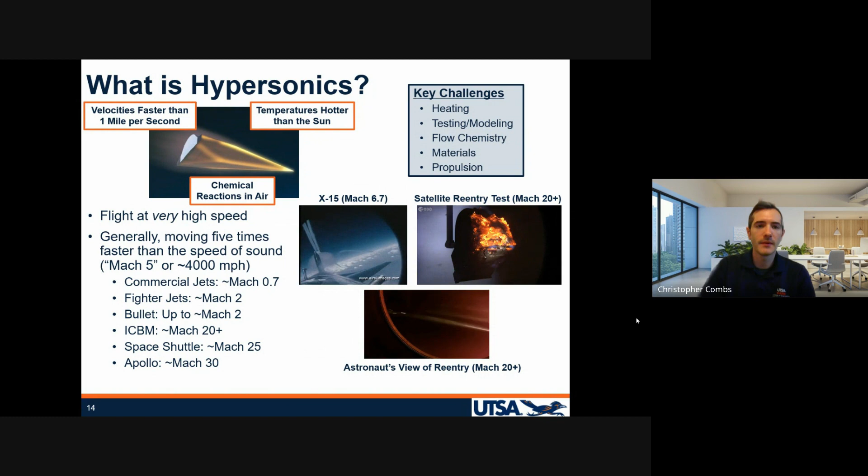And if you're coming back from the moon, Apollo, Orion, it's Mach 30 plus. All right. So we're talking about things that are moving very, very fast. Now, there's a lot of motivation to be able to ground test these things, because it's a real challenge to create this environment. And like I said, if you do a proper flight test, it gets expensive fast. A single flight test would build you a really nice wind tunnel facility, okay? Because $10 million is a cheap flight test of a vehicle, and that's kind of sounding rocket type scale test.

And on the computational side, I mean, it's 2024. We have a lot of computing power that we didn't used to have, but even still, these problems aren't particularly tractable. They're multi-physics. When you've got some of the heating issues happening, and some of the chemistry going on, it's a coupled multi-physics thing that's really challenging to get right from a simulation perspective. And we don't have the experimental data even to anchor those models. So we are still heavily reliant on ground test measurements. But even those are imperfect.

There are high enthalpy ground test facilities or hot facilities, because like I said, in this true flight environment, hypersonic regime, you have an incredible amount of heating, which becomes one of the defining factors of a hypersonic system. So one way that we can do that is with an arc heated or plasma jet facility, and there are very few of these in the world. Really, only a handful in the United States. You really just have this large arc in the plasma facilities. It can be inductively coupled plasma, which works in a similar way, but you're creating a lot of heat flux that can actually be representative of reentry conditions. These are pretty much the only way that we can reliably test space reentry materials or these high temperature ceramics and ablators.

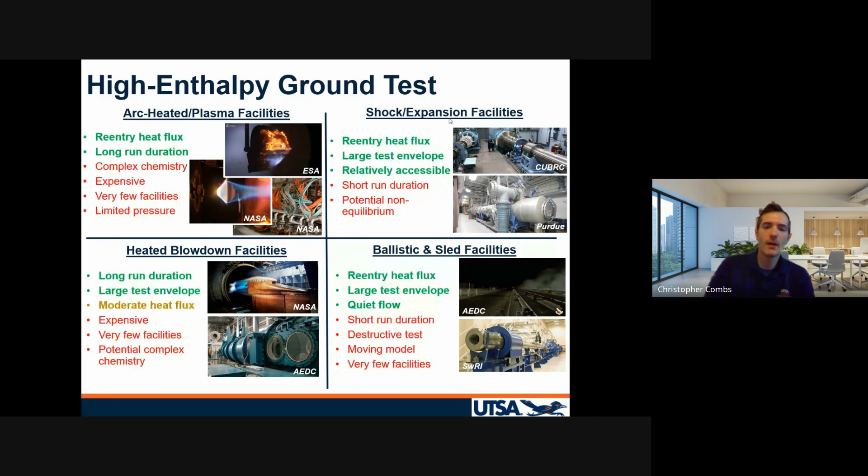So what we did at UTSA: all of these facilities are very complex. They all come with their challenges and still don't quite hit the mark. So to have something that students could actually run on campus, we actually went low enthalpy. We said, let's not worry about the heating side of it, and let's focus on the aerodynamics. So we can do high Reynolds number and high Mach number up to Mach 7.2. Actually, we can hit Mach 11 if we switch the test gas to helium.

We built this tunnel on campus, like I said, mostly built by students. It's what's called a Ludwieg tube facility. It makes it a lot more accessible. And compared to facilities where you're looking at costs of maybe $1 million a week, we have very, very low overhead here. A single test in terms of raw materials costs as little as $10 or $15. It's an 8-inch by 8-inch square test section.

That's right here. The way that this works, you have high pressure on this side on this long piece of pipe, low pressure here in the vacuum section, and the nozzle. You've basically got a diaphragm here, and you pressurize this air up until that metal diaphragm pops and bursts open. That allows the high pressure air to rush through the nozzle into the vacuum. And then we test here; this nozzle, shaped just like a rocket nozzle, expands that air out to high speed, and we get Mach 7 conditions here.

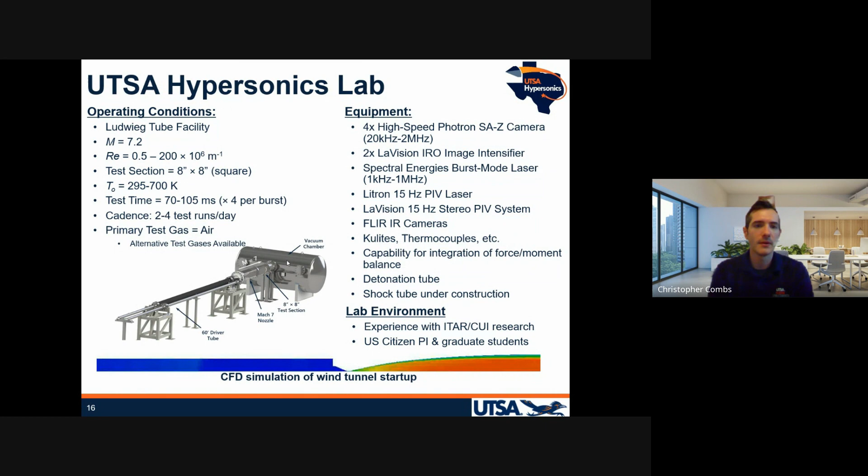And when we image everything with high-speed cameras that can frame up to 2 megahertz, it's actually a really long time. When you play things back at 30 frames per second, like you're used to watching movies, we get 10 or 20-minute videos of what's happening during steady conditions in our flow. So we get lots and lots of data. We can turn the facility over very quickly, really in about 20 minutes. So we can, this says 2 to 4 times a day.

It's probably more than that now. I think our record is 7 or so. Most of our time usually is not limited by the facility. It's limited more in changing out our experimental setup, messing with optics and cameras and stuff, because we do a lot of advanced diagnostic work.

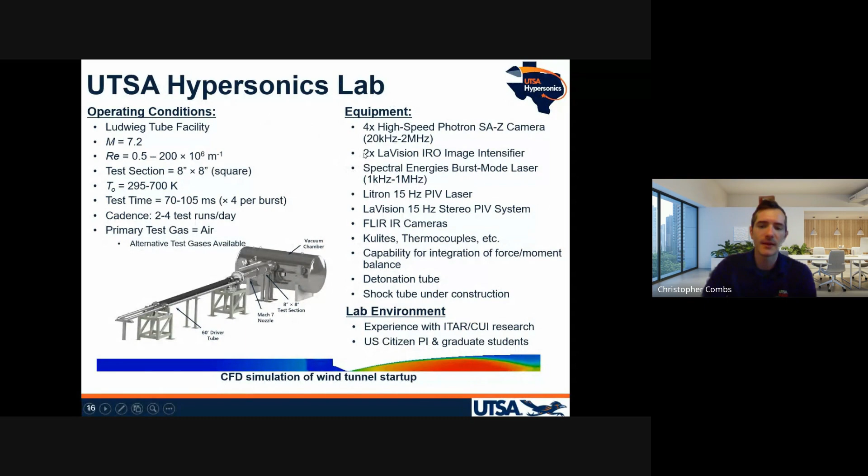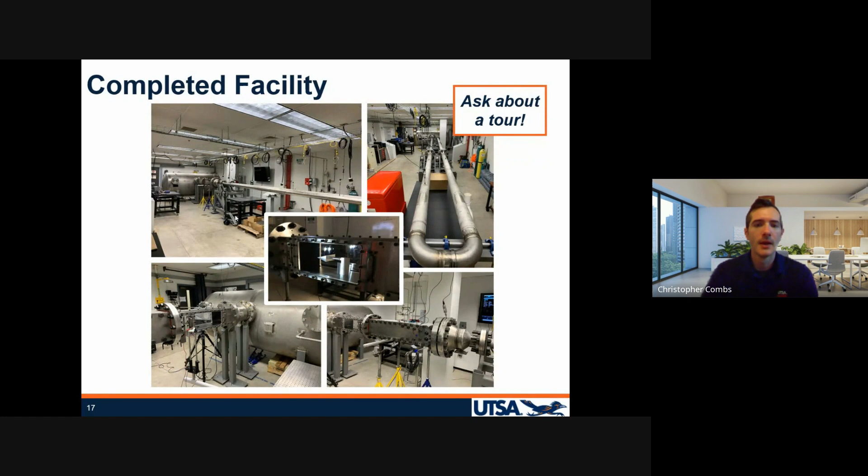And I kind of like to point out, all right, this is real. We built it. I see a lot of stuff like this where, you know, they're kind of PowerPoint facilities. It's something that's aspirational, but whether or not it ever actually happens, who knows? We've been running this for a while. We've had over 600 tests since we built this thing 3 years ago. So it came on really well and has been a real workhorse for us.

And like I said, the students are the ones that have ownership of this facility in my eyes. They built it, they operate it. That was kind of part of the design, and that was part of the motivator for why we went low enthalpy. It was going to make it easier for the students to work with and train on, but it's given us a capability where we can do some very relevant aerodynamic measurements, as I'm going to show you, without worrying about some of the more complicated physics that you deal with that are not always tractable.

Also, I'd like to give some context here for the sort of gap that exists in hypersonic tests. Now, few of us there are. It's a small community. So in the U.S., there's about 20 places that are doing active hypersonic ground tests. And this includes our national labs, universities, NASA centers, et cetera.

Now, if you limit this to universities, there's about 13 doing hypersonic tests with tunnels at M greater than 5. And then at places with a Mach number above 7 that they're capable of testing, there's really 6. And I'm kind of being generous. A couple of these aren't particularly active. So it's a very small group.

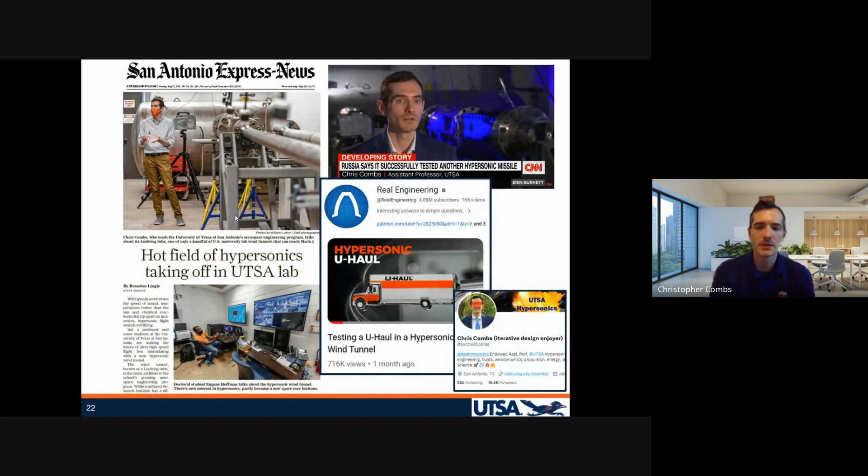And we've gotten a lot of press about this. We've been in the local news. There's a Real Engineering video. If any of your students like that channel, check it out. We've been on CNN and have a bunch of good social media outreach. So it's been fun, the positive reception that we've gotten for this tunnel.

And so what we do in this lab, it's about half our portfolio are fundamental fluids measurements related to aerodynamics, and about half are really focused on developing those measurements. So we do a lot of both. And then when we've got these high-speed measurements, a lot of laser diagnostics and imaging that happen, you're getting gigabytes of data for every shot.

That requires a bunch of statistical analysis just to pull a thread to understand what it is that you're seeing in the data set, and a lot of image processing. The students probably spend more time writing code than they do actually conducting their experiments, because once they get that pile of data that they're sitting on, they've got to make sense of it. So that ends up being a good chunk of our time too, developing those analysis tools.

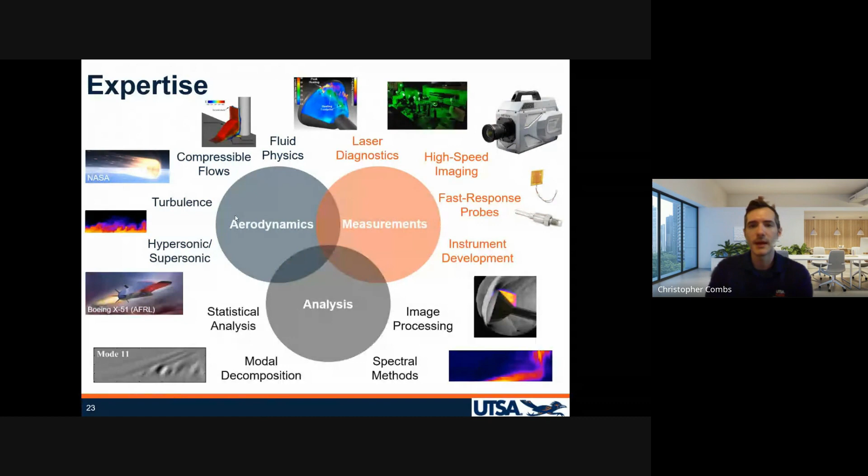And a big focus, like I said, is on developing these measurements, which is not necessarily straightforward. I tell people, anytime you can measure something at Mach 7, it's a big deal, because that's a hard thing to do. As I kind of alluded to, we've been doing hypersonics since the 1940s. So this is not a new flight regime, but a lot of these measurements are new. Because for a while, we were sort of limited to point probe-based techniques. You have a pressure sensor that you scan around or something like that.

But in these facilities, some of the ones I've talked about, and in our facility as well, whether you've got plasma and high temperatures or the run duration is short, you don't want to be restricted to scanning something. Also, if you have an intrusive probe, then you're changing what you're measuring. Some of these probes won't hold up in certain conditions. So it's appealing if you can do something non-intrusively with optics and light and cameras to measure not just a single point, but an entire field of view, or maybe even a three-dimensional field of view.

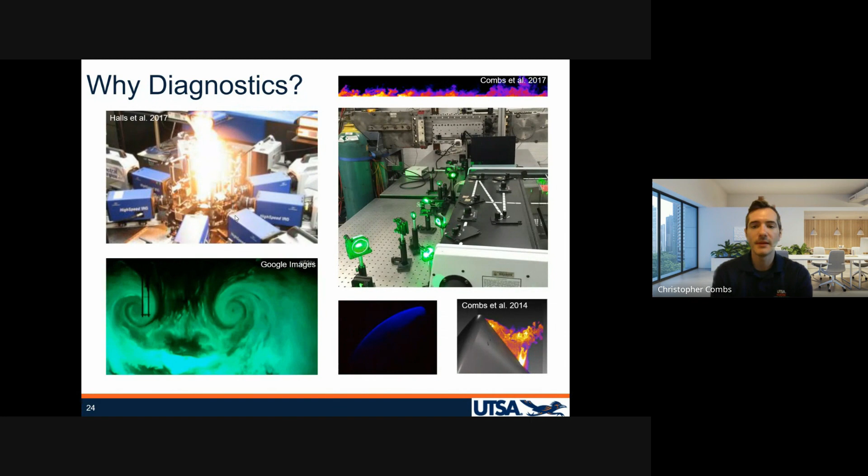That becomes very powerful. We didn't do this for a long time just because of the limited availability of the technology, but now high-speed cameras and high-speed lasers are becoming commercially available, which has made these things much more tractable. So we do use a technique called schlieren imaging. That is sort of our bread and butter first thing that we throw at something that is pretty reliable, just to do visualization of the flow.

That's what you see. This is just an air jet right here, but you're going to see some examples of this in the tunnel. We do a lot of free flight testing where we actually cut a model loose in the test section, let it fly for that 100 milliseconds. And then the nice thing about the free flight testing is you can get your forces and moments. I'll talk about that in a second.

We've got a technique called planar laser induced fluorescence, where we introduce a chemical tracer into the flow, and then we can tag it and track it with a laser and a camera. That's really great flow visualization on the surface, but you can turn that into things like pressure, temperature, mole fraction if you understand the chemical well enough. You can also track where the molecule goes in this technique called molecular tagging velocimetry that I have a slide on here in a second.

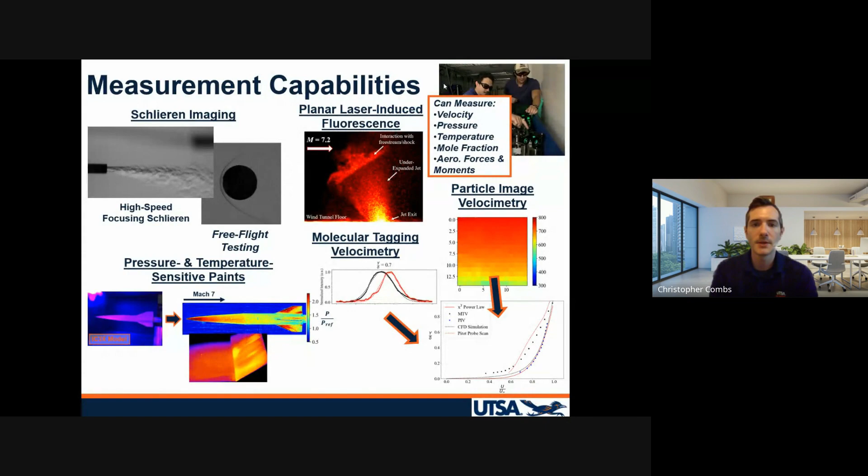We do velocimetry with our lasers using a technique called particle image velocimetry, and we even develop pressure and temperature sensitive paint in-house. And I've got some slides to talk about that briefly also. But really, overall, the big picture is with the various non-intrusive techniques that we have, sort of our mantra is if someone wants a measurement, we have a way to do it. And pretty much any quantity of interest you can dream up, there's probably a way that we can measure it. And if not, then that's a proposal I want to write because I want to make sure that we can measure everything in this tunnel that we want to.

So molecular tagging velocimetry, I like to highlight this one first because it's really elegant and simple and works extremely well. Basically what we do, we introduce a fluorescent tracer into our test section. And one of the advantages of a Ludwieg tube facility like this is we can just put it in our driver tube gas and then it's everywhere all the time. And so what we do, then we create a laser line through our test section when the tunnel's running, and then we mark this species. We basically tag a line.

And then the nature of that fluorescence, and we're actually realizing this is phosphorescence given the long-lived nature here, is once that laser is turned off, you continue to see the fluorescence and the phosphorescence from the chemical species. So there's a lifetime from the phosphorescence that's on the order of hundreds of microseconds. All right, so it hangs around for a while. And then what you see here are multiple exposures on our camera of this line basically as it's marching downstream. And you can see the intensity is decreasing as the lifetime fades out. But we get this tagged line moving through a test section.

All right. And so then you know the change in time between your camera exposures, and you know the change in distance between those lines because you did a calibration with your scaling before you run the test. And so if you have delta X and delta T, then you can get velocity, and so you can get these pretty well resolved free stream velocity measurements this way.

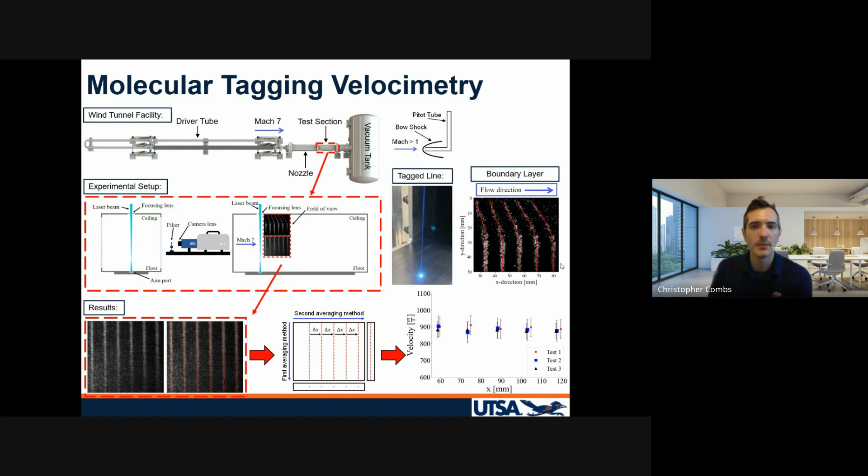But you can even do it in a boundary layer as well, and you see these classic boundary layer profiles developing as these lines march through in your boundary layer also. And that's actually lined up reasonably well with a bunch of our other techniques and pitot probe measurements also. So we published a paper on that.

That was really nice. Like I said, we do the free flight testing. There's a bunch of different ways that we're able to do this. The simplest, so this is just a bouncy ball. And we literally just take a piece of floss or fishing line or string and super glue it to the ball. And then when the wind tunnel starts up, that pulls the thread away. And then you just have this free flight test article. And the time scale of gravity is very, very small relative to the aero coefficients here.

And so what happens is when we do object tracking with these models, and if you know your model's mass and you know your delta X and delta T again, over successive images, not only do you have velocity, but you have acceleration. And so if you have mass and acceleration, then you can get all of your forces and aero moments and coefficients. For non-symmetric models, we can get pitching and things like that. So this is a sphere.

It's the easiest case, but we realized pretty fast that the string approach really only works well when you have a model that's symmetric and you don't really care about its orientation. So something the students developed was this kind of swinging arm mechanism, as you see here. You basically have a little saddle that you build, and this is just a 3D printed plastic part, and it's on a hinge. When the tunnel starts up, you can see this hinge falls away, and then that leaves the model in the test section to fly by itself.

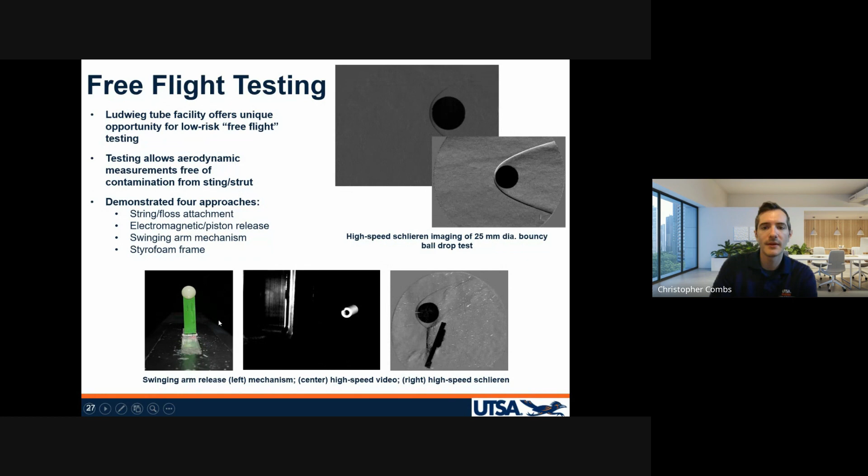The other clever thing that the students came up with was a styrofoam release, where you basically, like you see here, you get a big piece of styrofoam and you cut a hole to hold the model. And then when the tunnel starts up, the styrofoam breaks and falls away. And this was some testing that they did that was representative of the NASA Dragonfly concept. And so they've got a mission they're planning to send a drone to Titan, which is pretty awesome if you ask me. And the students heard about this and they got excited.

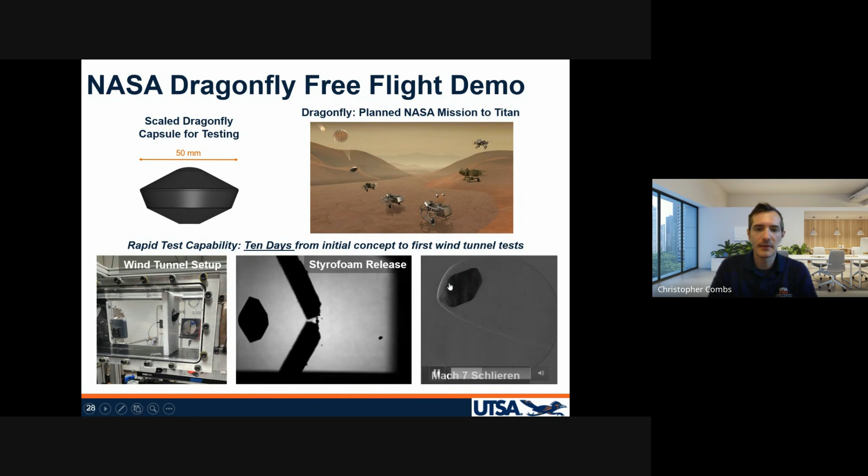We also realized that even though our tunnel is cold, we actually represent the conditions on Titan really, really well. And we can put a little bit of methane in our test section and pretty much match that atmosphere identically. All right. And so we were able to get some stability measurements for NASA on a Dragonfly capsule, which was neat. And I need to speed up because I got a lot of slides left and I got about 10 minutes.

So one thing, this is from the Joint Hypersonics Transition Office. We're looking at separation events. So there are a lot of different cases where you can imagine one body separating from another body at very high speed that we would care about, whether it's like a store separation, a booster drop, a stage separation, or even like a shroud opening up. There's some very complicated aerodynamics at play that are difficult to capture and model.

And this is one of our projects that's CUI, so we can't share the results, unfortunately, because there's some really neat stuff. But this has been a fun project to work on. We're in year 3 of this one, and it's gone really well, just looking at the aerodynamics of things that are flying apart.

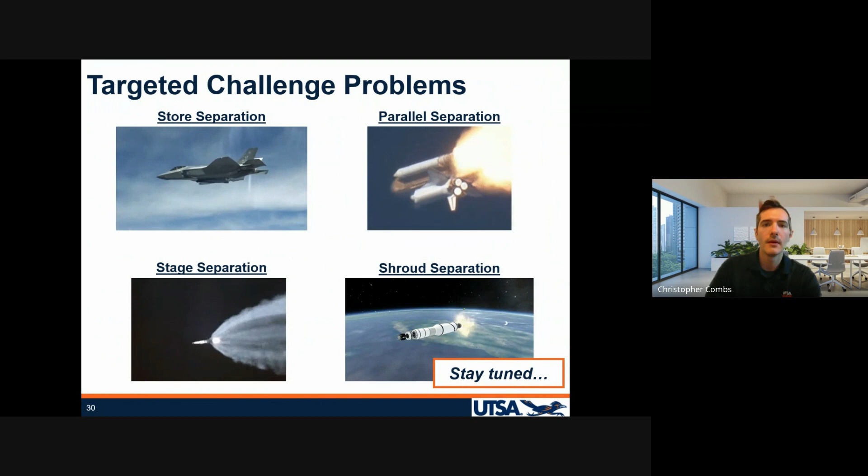Let's see, we've got a hypersonic jet in crossflow problem that we're working on. Basically, when you're flying this fast, flaps and fins don't tend to work, especially when you're up in the upper atmosphere because of complex interactions that get generated. So you're relying on reaction control jets, just like the space capsules when they're docking with the space station or something like that. But the issue is you get down in the atmosphere and you start flying and you're moving at Mach 10.

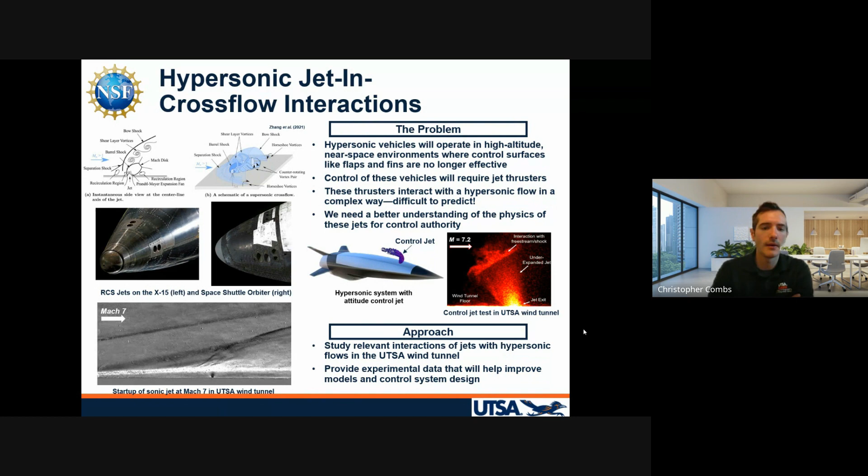Suddenly those jets have a really strong interaction with the oncoming flow. You can actually get negative control moments relative to what you're supposed to have because of the aerodynamics there. It's not super well understood. There's some pretty complicated things that happen. You can generate a lot of heating. So we're making measurements of these jets to better understand what's going on and try and give some data that can anchor some modeling as well.

Another fun one is we're working with a collaborator here that develops what's called architectured materials. And they actually build and 3D print materials with a unit cell architecture that can give you sort of custom tailored properties. And so one example that we have is you can damp certain frequencies based on how you design these unit cells. And there are some cases in like a high-speed flow where you have some unwanted oscillations that maybe we would want to damp.

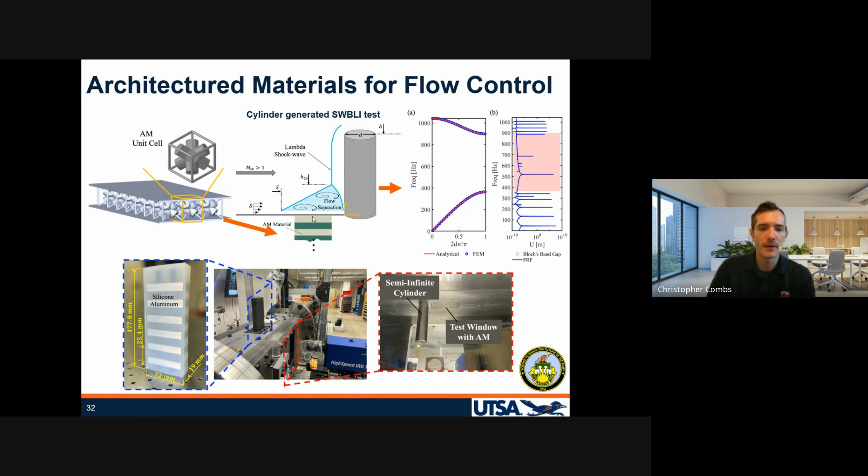And so we designed one of these materials to target that frequency, put it in the tunnel, and we sort of forced that oscillation that normally you wouldn't want, but we wanted to show that it was there. So we created this oscillating shock wave and then placed the material in the vicinity of that shock wave oscillation. And we actually were able to show that it damped that interaction. And so then we got some funding to pursue that further. And now we're working on version 2 to iterate on that further and try and further improve the technique.

Another one that we're working on that's NASA funded is this thing called FAST, the full airframe sensing technology. I talked about how expensive flight tests are. Like I said, $10 million is a cheap flight test, but you're limited in how many sensors you can actually pack on a flight vehicle and how much data you can extract from that thing while it's in the air. So we kind of want to do as much as we can with that sparse sensing network. And we asked the question, well, if you can use modern artificial intelligence and machine learning tools to connect the dots between a sparse network of sensors, would that actually give you something useful?

Because there are a lot of instances where maybe you have a limited number of pressure sensors or temperature sensors on the flight article, we started gathering some test data. That's our role at UTSA, is to get the truth measurements. And then we've got collaborators at the University of Texas that are actually doing the AI ML work and trying to sort of fill in the blanks of those data sets.

And then you can ask yourself, well, if you can extend that problem to get, say, pressure or temperature everywhere on the surface from a sparse network, can you then further take that inverse problem to get something like stress on the surface? Or if you have pressure, temperature, and stress now, could you extract velocity off the body if you know enough about the flow physics? And so that's been a really fun one to work. We've been using this technique. I think I have a better slide here in a second to kind of talk about it more.

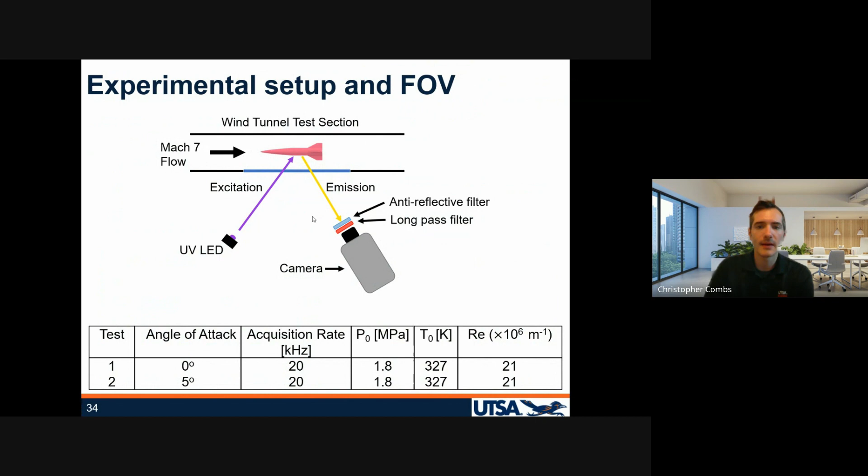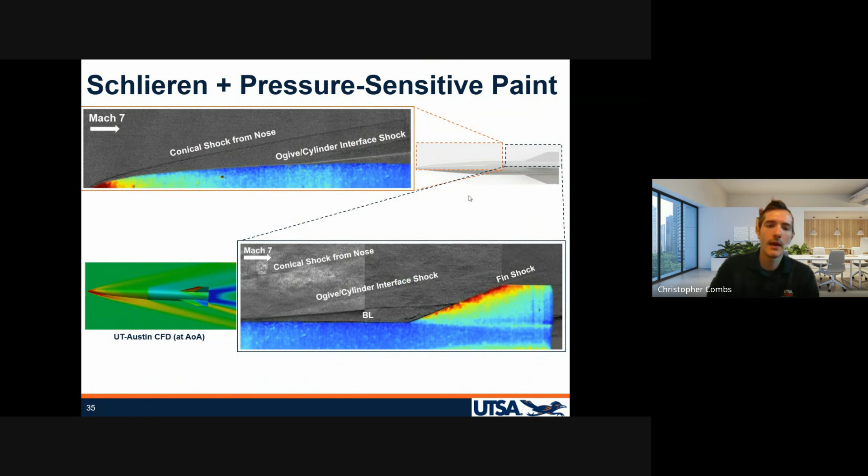But we paint these models with pressure and temperature sensitive paint, which is paint that we make in-house that actually responds to changes in pressure and temperature. And, here's a better one, we actually see the pressure distribution and the temperature distribution on the surface of the model in real time. And so every pixel of your camera becomes a pressure or temperature sensor. And it's fast response as well. It's unsteady, several kilohertz. So we can actually see fluctuating quantities in the pressure as well.

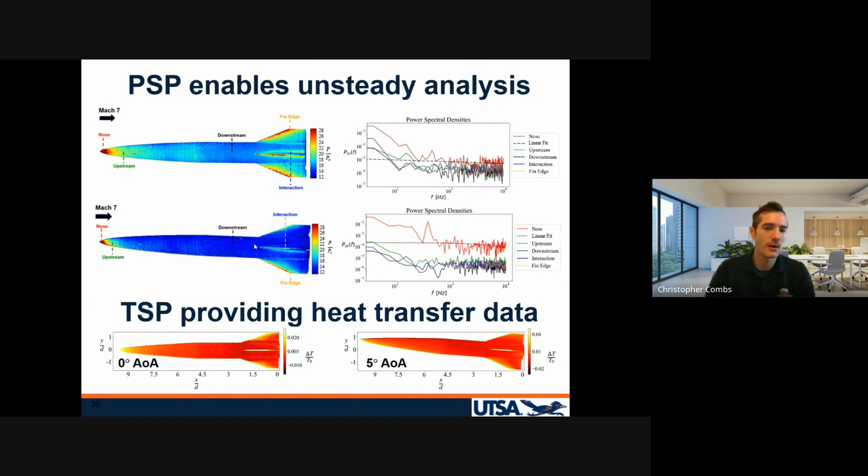One other one I was going to highlight is this Air Force project where we're looking at shockwave boundary layer interaction physics, basically in a high-speed flow. Anytime you have something sticking off from a body, even if it's a fin or a control surface or a flap, it creates a shockwave in front of it. I was kind of alluding to this undesirable unsteadiness, and a big part of that comes from shockwave boundary layer interactions. They can oscillate at several kilohertz, create some really harsh acoustic and thermal loads on a vehicle.

There's even some historical incidences, say with the X-15 flight vehicle ripping off a pylon on a test article. So they can really do some serious damage if they pop up in a place you didn't want, or if they behave in a way that's unexpected. We've spent 60 years studying shockwave boundary layer interactions, and still don't understand them as well as we would like. And we realized a lot of these hypersonic systems are going to have non-smooth surfaces. They're ablating, they've maybe got tiles or some sort of roughness.

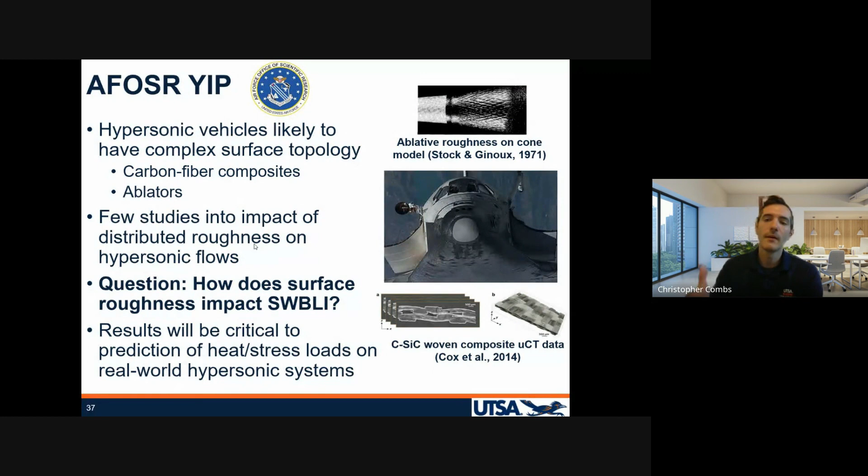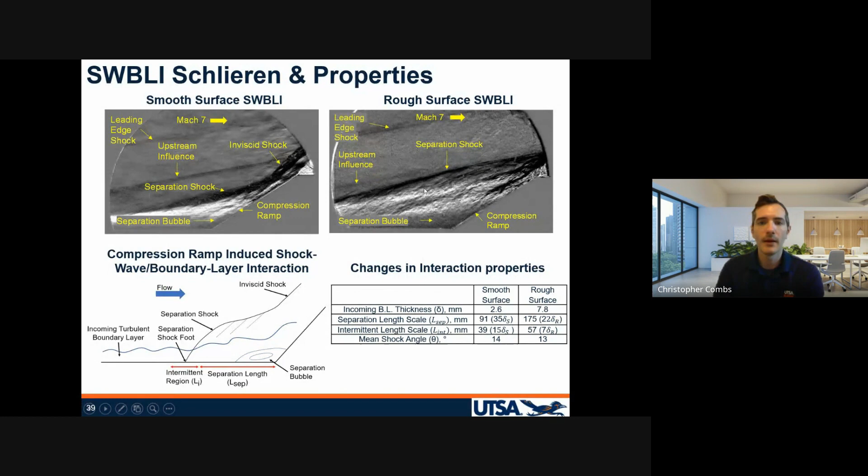Almost all the shock boundary layer interaction research that we've done in the past is using polished, smooth stainless steel surfaces, which really is not representative of a true hypersonic system. So now we're starting to dig into what happens if you have something rough. We used a carbon fiber template to sort of make a comparison. The big takeaway that we had is these interactions are very, very different. Things scale by about a factor of 2 for the rough case. It totally changes what the interaction looks like. This is smooth on the left, rough on the right. And here's smooth, rough.

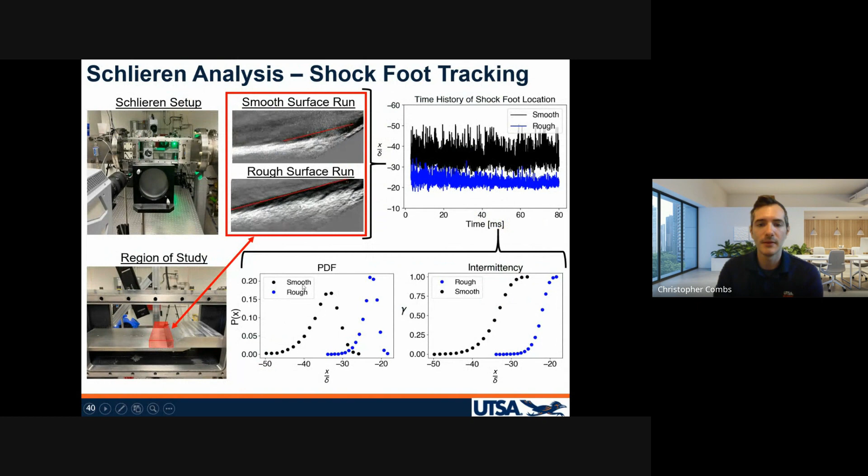You can see how different this interaction becomes. The dynamics change. We're able to track the shock wave with some image processing that the students do, and get PDFs of the position, get all this unsteady data, which then you can turn into spectra. You can see the frequency content changes considerably. But there's some ways you can scale things and start to get them to line up. So we're starting to understand this better, work towards a predictive capability.

And actually, we've been working with Microsoft on some AI stuff that they wanted to do to speed up the shock processing code, and they've actually done it by about a factor of 10 using AI tools. So we're kind of exploring that also, which is interesting.

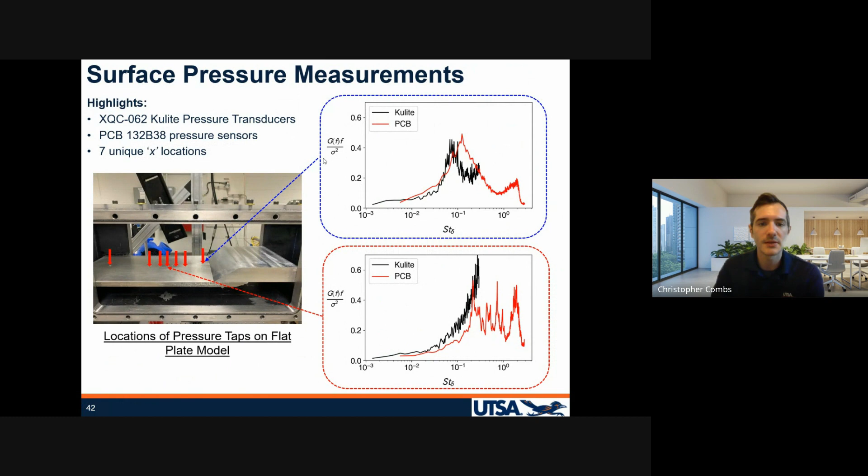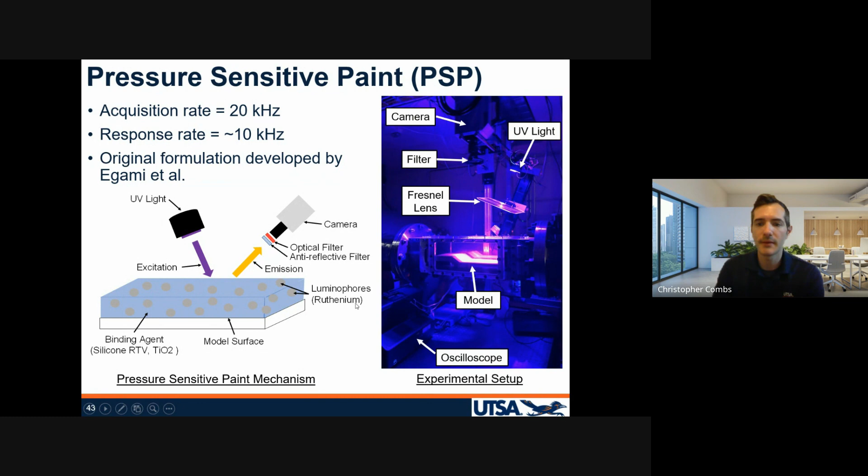And then, we compare this to surface pressure measurements. Again, everything very high speed. These are megahertz response rate surface pressure sensors. And then compare that again to the pressure sensitive paint I was talking about. You can see it here. It looks sort of bright, hot pink when you illuminate this stuff in the lab. And like I said, you just image this paint with a camera and you're going to get a response that corresponds to pressure changes on the surface.

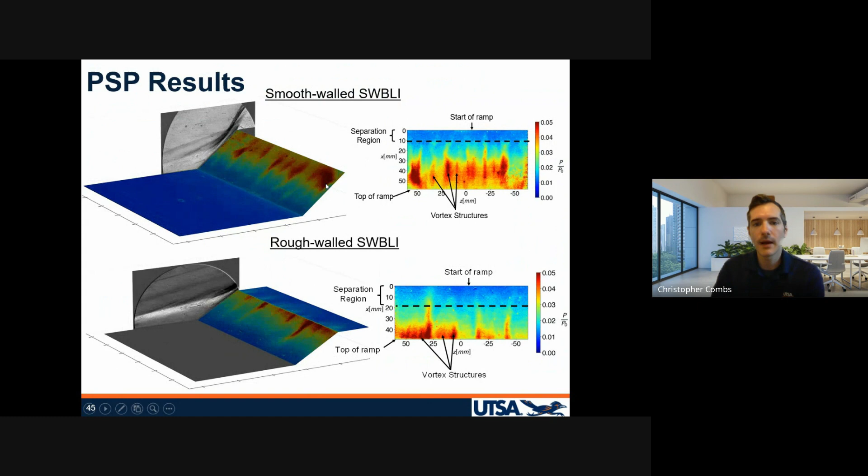All right. And so this is what we see on the back end of that compression ramp. There's a shock wave here. You can see in the Schlieren, this is kind of the side view. So the shock wave is coming up here, and then the flow separates, and then it reattaches, and then you get these streak structures on the back end where the pressure comes back and hits very fast. And you see it look a little bit different for the rough case, but these are responding at kilohertz rate in our hypersonic wind tunnel, in that kind of 50 to 100 millisecond test time.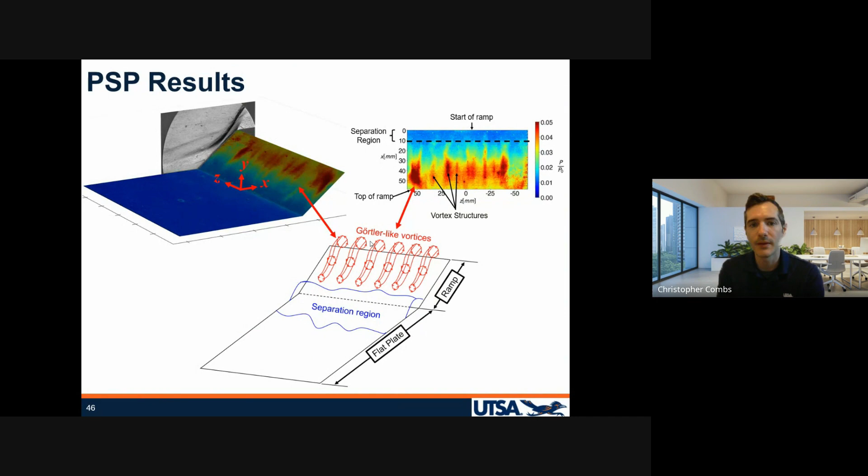And from a fluids perspective, what we're actually seeing here are these little vortices that roll up along the backside of the compression ramp there, which, exactly why they're there is something that I have arguments with people about. The folks in this community, we kind of argue about it over dinner when we see each other, like what exactly is going on. But there are a bunch of groups seeing the structure now that we're getting higher resolution data with the tools available today. And people aren't exactly sure what these are, what they're coming from. But that's probably a big part of tying up this whole shock boundary layer interaction problem.

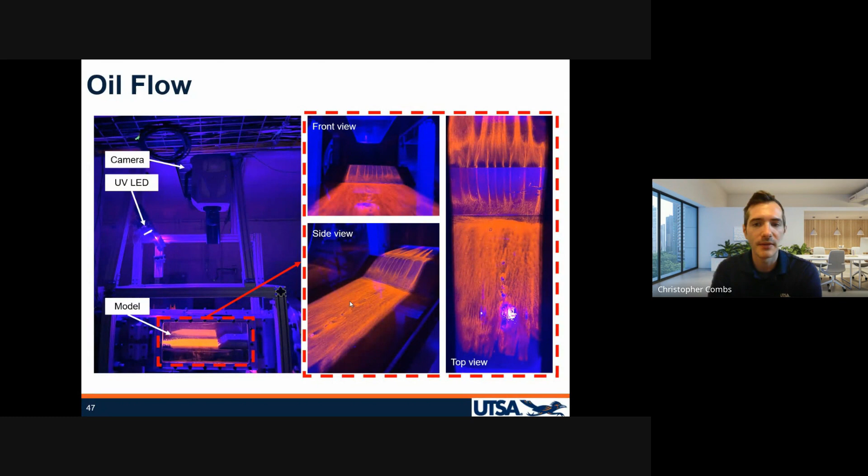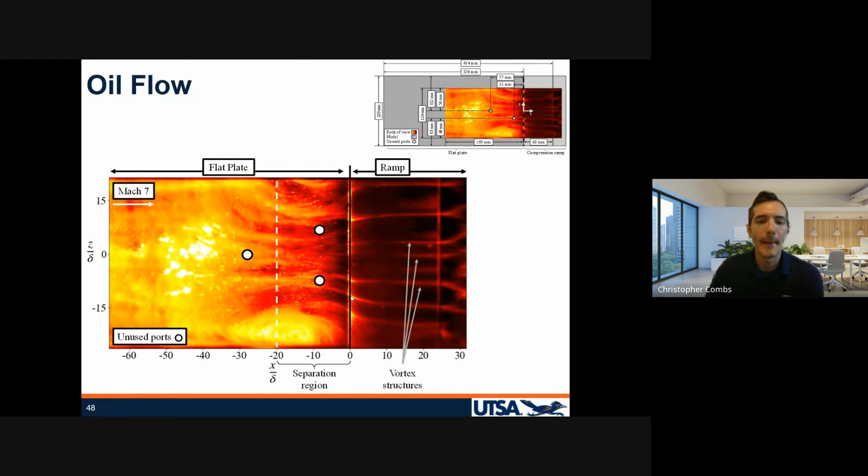We can even do oil flow, where you quite literally take some very thin oil and put some fluorescent dye in there and coat it on your surface, and then you run the tunnel, and what's left resembles the flow features near the surface. I love this stuff because I think it provides a really striking visualization. The students hate it when I ask them to do it because it makes a mess and then they have to spend an hour cleaning it up later. So they're always trying to not have to do the oil flow, but every now and then it's nice to do because, again, you see these vortices, just like we saw in the pressure-sensitive paint, that pop out. You can see some recirculation and separation region here. So you get a lot of interesting structure in really what's a pretty straightforward application.

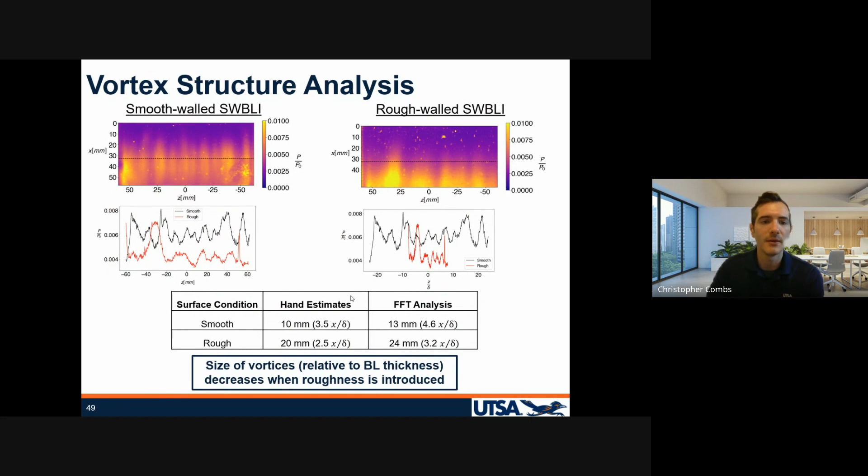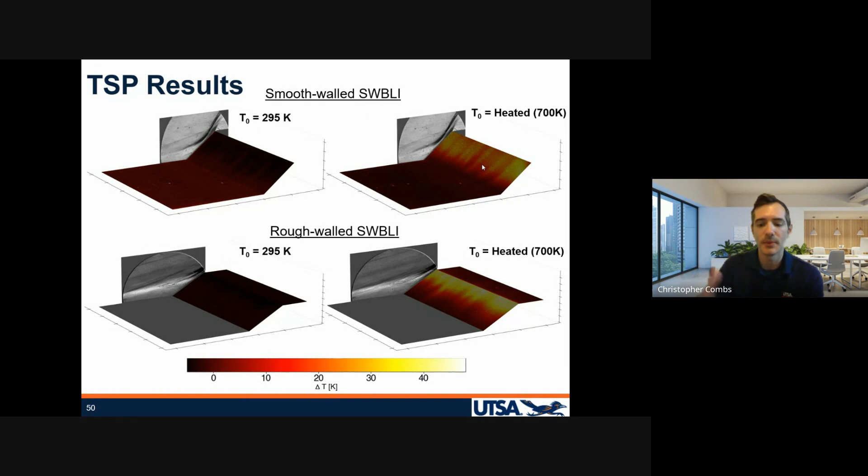And then, I need to wrap up, so I don't want to get into this too much, but you see these vortices that we can do a bunch of different types of analysis on using various tools. And we did this with temperature sensitive paint as well at different heating conditions. And you can see the same structure evident in the temperature case too. But because of the nature of how temperature actually behaves, how it interacts with the model, you don't see rapid responses the same way that you do pressure, because there's some capacitance basically in the model, right?

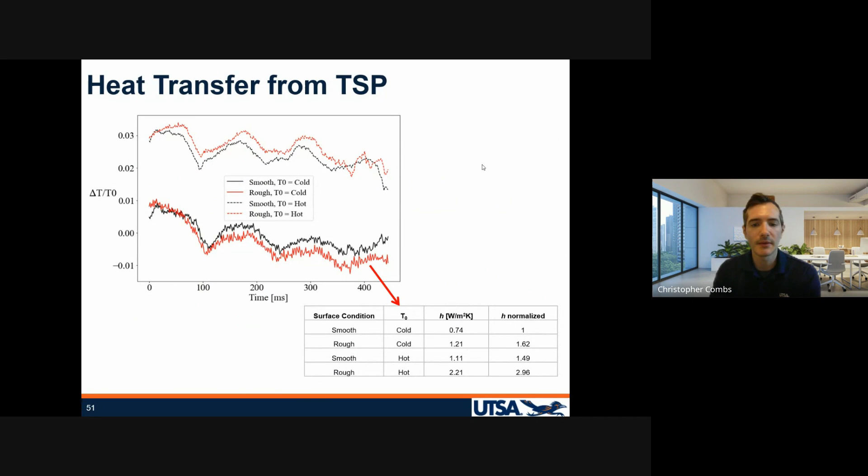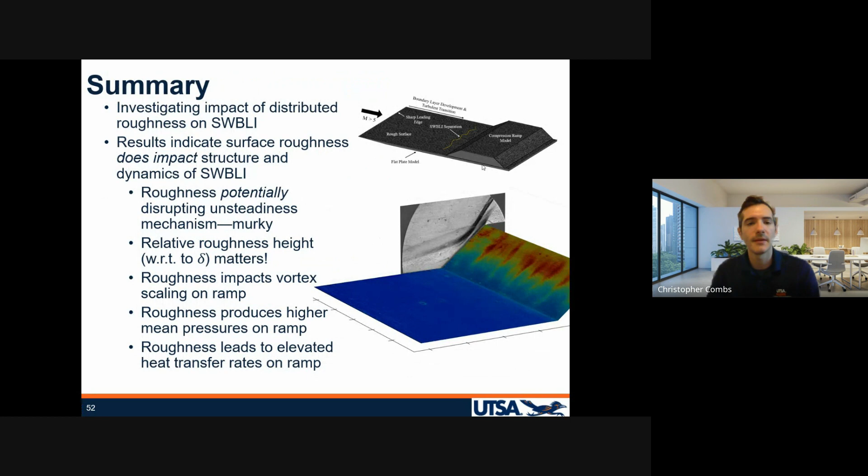And that lends itself to heat transfer analysis. You can get heat transfer coefficients. One of the interesting things that we saw is that for the rough surface, the heat transfer rates are considerably higher. Kind of part of the big story that we're seeing. The rough interaction was notably different. And we can tell it's definitely something that people are going to have to account for when they're designing a vehicle.

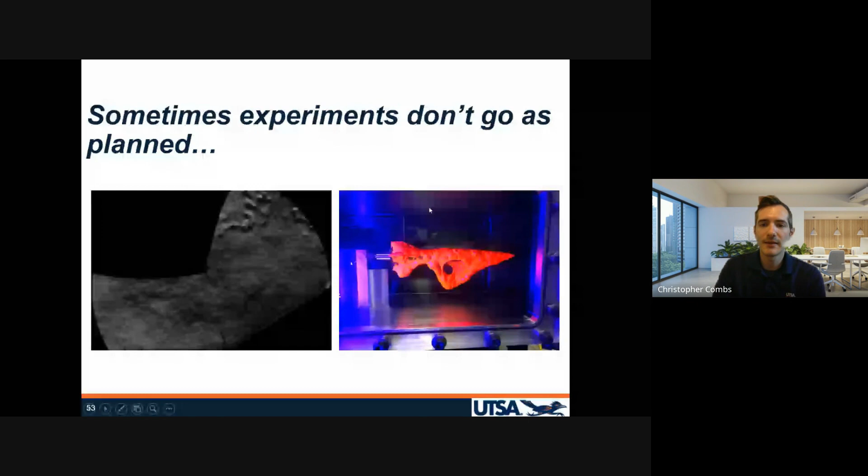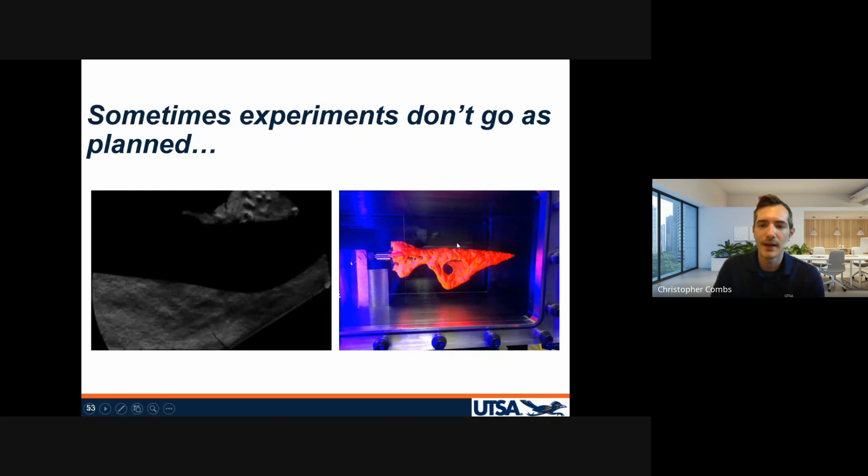Here on the right, somebody was trying to apply oil flow to one of our vehicle geometries, and I don't know what happened with the mixture here, but we pulled the vacuum, the stuff bubbled and ballooned, and that was a mess. So this kind of stuff we deal with. It's a process, right? Especially, and these students are learning. We've done a lot of fun stuff. Do some fun demos in the tunnel with students, a Cybertruck and a U-Haul and a cow in there.

Some of the things that we're moving towards next, we've got a high-speed IR camera that's going to allow us to do temperature measurements very fast. That's coming in April. We're doing more velocimetry. We're working towards what I'm calling 4D imaging, where we can get 3D images that are time resolved with our laser, which nobody's ever been able to do in a hypersonic condition.

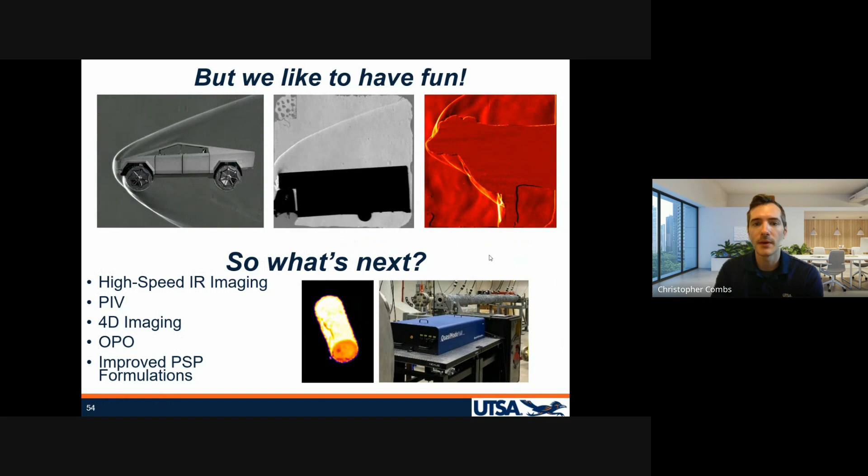And we're going to start using this thing called an OPO, which is an optical parametric oscillator that allows us to tune our laser to different frequencies, basically see different things, and keep tuning the pressure sensitive paint and temperature sensitive paint formulations too, to make them better. Because like I said, we are making those here on campus ourselves. There are companies that'll sell it to you, but we figured out how to make them. So we've just been doing that.

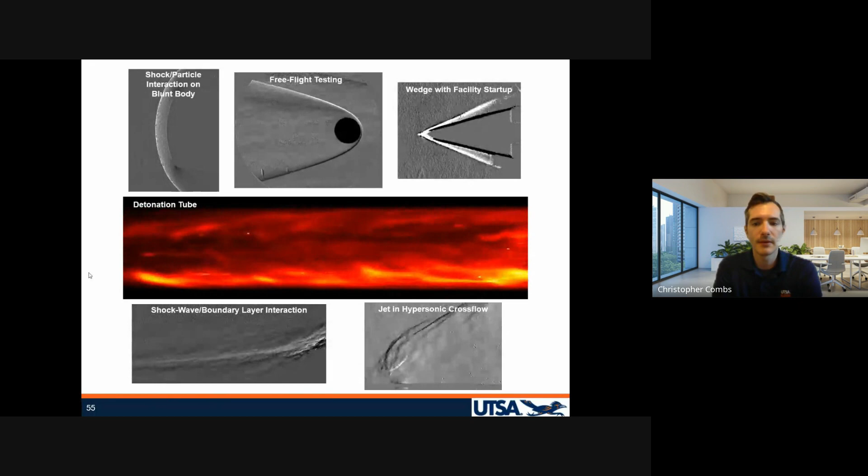And then, yeah, the high-speed cameras are fun, right? They allow us to do a lot of different things, look at a variety of different types of flow features. I didn't even get to talk about our detonation tube that we have, where we did some rotating detonation engine research, but we've had some fun there too. So I think, yeah, this is probably it. These are some of the other fun ones too.

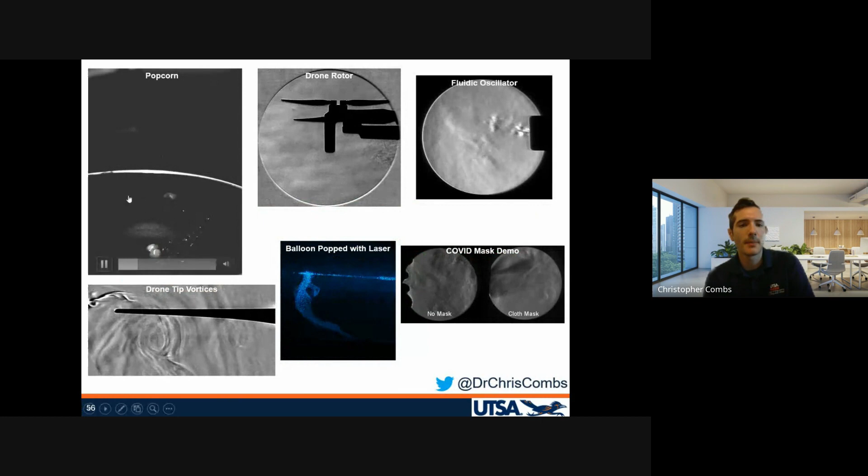This is popcorn at 10 kilohertz. You can see the kernel open up. We've done some drone analysis. We did a COVID thing, popped balloons with lasers. So there's a lot of fun stuff we've gotten to do with the cameras. I do really like the popcorn one. I feel like that's pretty relatable. Everybody has popcorn, right? And getting to see the kernel open up at really high speed is kind of a neat thing.

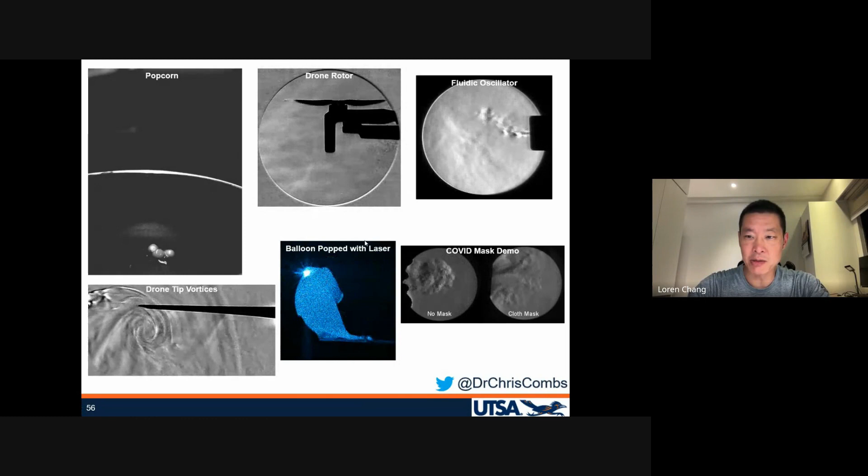And then I think sort of connecting through the center to pool resources and really build that way has been great.

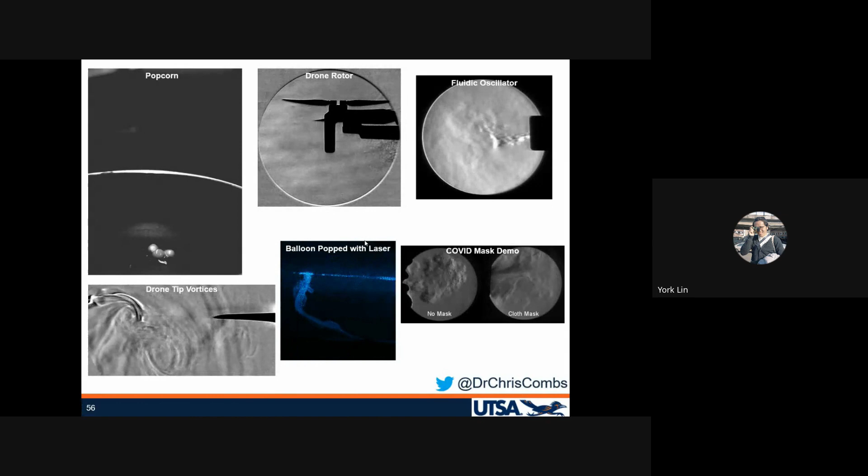I'm trying not to make this discussion become too nerdy. So I want to ask a question about what's the role played by the public sector in building the hypersonic wind tunnel at UTSA? How did NASA or Air Force contact you? Did they contact you directly and say, okay, let's build a wind tunnel? Or what's the whole story? Because I understand that public sectors really need to support academic research like this, and a wind tunnel like this. We don't have such a wind tunnel in Taiwan here. So I'm pretty curious about the whole story.

Yeah, actually, the public sector, in the sense that you're talking about, was not a part of this. I came to UTSA in 2018, and the tunnel itself was entirely funded with UTSA dollars as part of my startup package. That was something I negotiated when I came. They gave me the lab space and the money to build it and to renovate the space. All in, between $1 and $2 million probably to build the tunnel that we have, which is pretty cheap for the capability that we came out with. I've seen things that I feel are less capable that were an order of magnitude more expensive.

We had a lot of students build it. We designed everything ourselves and just outsourced some of the custom manufacturing that we couldn't do. But it came together really well. I had the advantage that I had already helped build 2 wind tunnels before this one, so I'd learned a lot from that. And I'd worked on a few other wind tunnels as a grad student. So I'd been around a lot of them, and I had the confidence that we knew how to design this thing and build it. So yeah, it was entirely UTSA startup that funded it.

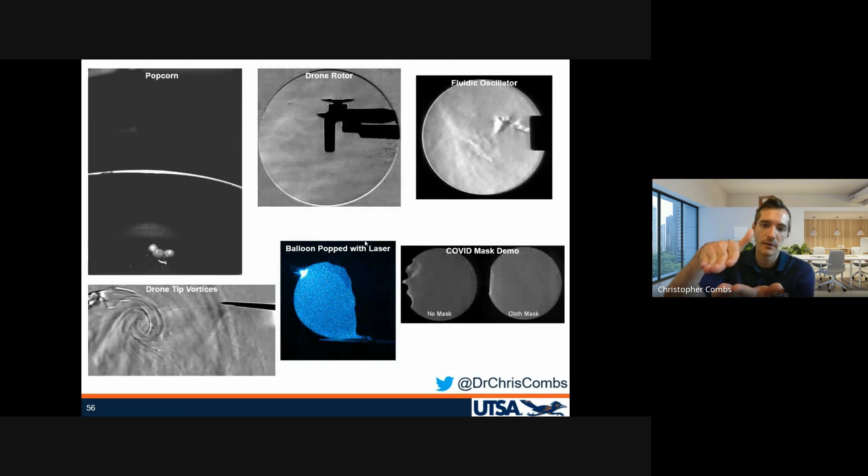But the way it actually works out is our Mach number for a fixed test gas is entirely determined by the area ratio of our nozzle. It's the way the math works out. What happens is you choke the flow at the constriction of the nozzle at the throat. Sorry about my dog there. So you go down to that minimum constriction, and that's Mach 1. And then the air expands back out, and that's when it starts to accelerate. And so we expand it out to a ratio where it works out to Mach 7.2.

And then for that case, changing the back pressure cannot change the Mach number further, because you can't go past Mach 1 at that constriction. So you're stuck, you're choked. What it does is it just changes your mass flow rate, which really means your Reynolds number is going to be different. Or in other words, it's like you're changing your altitude. So you increase the pressure on the back end, and it's like you're flying lower, really.

So the only way that we can change Mach number is we can change the nozzle, which we have not done yet. We've been using one nozzle the whole time, but we could, in theory, machine a new nozzle that would give us a different Mach number with a different geometry, or we can change the test gas. So, kind of like I said, you run helium. It's a lighter gas, you get a higher Mach number. So we're Mach 11 when we run helium, and then you could do a helium air mix and get Mach numbers in between. Okay, thanks. It's very interesting to see how these hypersonic velocities are attained. Yeah, it's a fun problem.

Okay, I think we have a question from Mr. Wang. I'm Yushun from National Central University. I'm a master's student in the Department of Space Science and Engineering. All right, great. So my question is, what's the advantage for the public to develop hypersonic technology in the atmosphere, except for military use like vehicles or missiles?

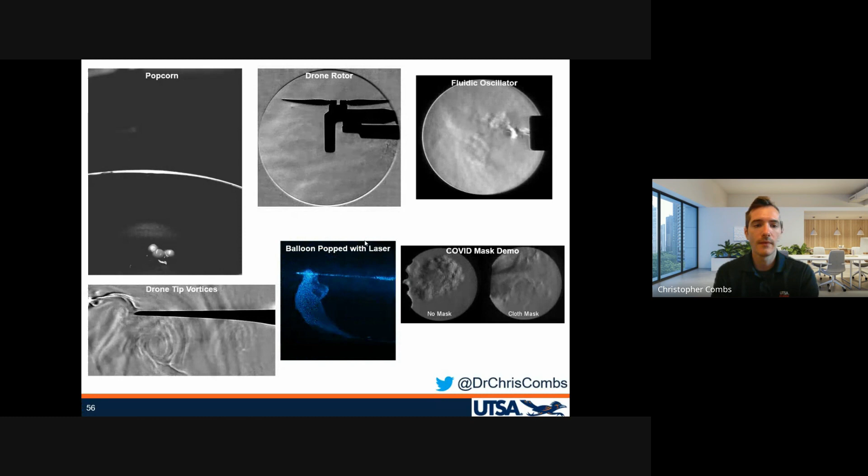Usually the best we're going to do is about one orbital period. And we usually don't know when they come down for a while. We could do better if we had a better understanding of hypersonic aerodynamics, because the space junk reentry issue is a hypersonic aero problem. So if you can understand those physics, then we could have a better feel for how space junk is going to return also.

And then the other side of it is the long-term potential for high-speed commercial transport, which is really interesting. There's some companies working on this. Hermeus is one here in Atlanta, Georgia, that's doing some really neat stuff.

And so, you know, you could imagine going from, say, US mainland to Europe in about 90 minutes at hypersonic speed, really getting anywhere around the world in 1 or 2 hours. That's a pretty exciting thing to potentially be able to do. And even here in the United States, we can get entire US coverage in about 20 minutes from San Antonio at Mach 7. So really instantaneous interconnectedness for people. If we're able to harness this capability, that's got a lot of appeal as well.

Yeah. Okay. Thank you, Dr. Combs. And can I ask a following question? Go ahead. Sure. Since you mentioned the high-speed commercial transport, what is your thought between commercial hypersonic flight and commercial suborbital flight?

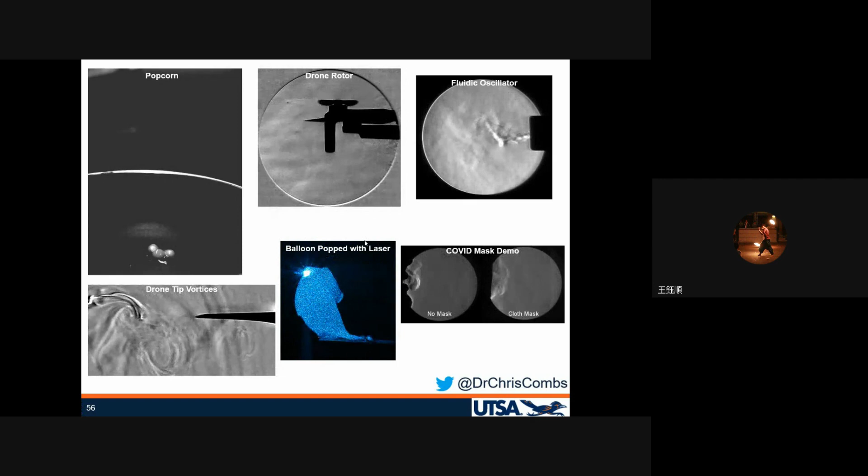Okay. Are there any additional questions for Dr. Combs? If there are no additional questions, I'd like to ask one more follow-up. In terms of international collaborations, are there any particular domains you'd be interested in collaborating internationally on at UTSA, and are there certain topics, for example defense related, that are more restricted in terms of who you can collaborate with?

Oh yeah, I'm definitely interested in collaboration. I think there's a lot of opportunity. The thing that I tell people, because hypersonics can get touchy, is that usually things can be open and public access as long as we stick to the fundamental physics. Once you start talking about specific geometries, specific flight systems or specific real materials, then you can start to run into issues and collaboration gets harder. But if we keep things mostly public domain and focus on the foundational physics or development of really novel things, then it's generally not a problem.

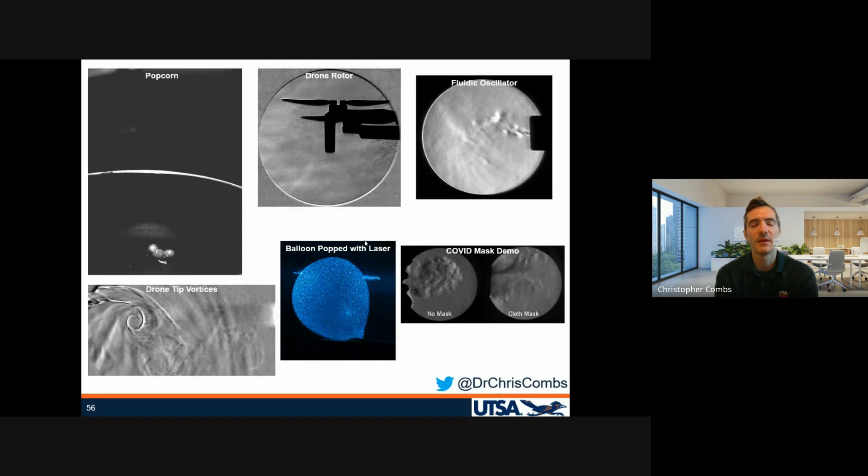There are certain funding agencies that want to make anything hypersonic controlled, but a lot of the ones we work with are not like that. So there's plenty of room for collaboration, as long as we don't pitch the connectedness of something to a very specific vehicle geometry. It's generally okay. Okay, thanks. That's really good to hear, and hopefully there's plenty of room for future exchanges and collaborations between institutions here in Taiwan and the work you're doing at UTSA.

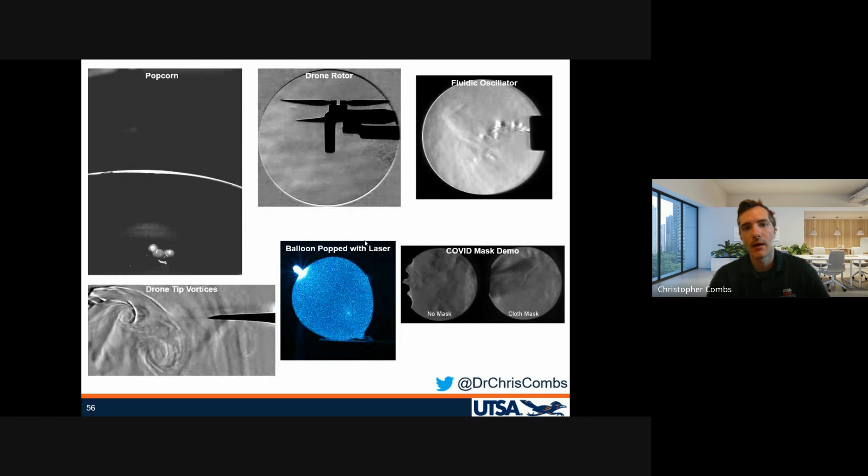Absolutely. I have a lot of U.S. citizens in the lab, and there are projects that are U.S. citizen only, but I have a handful of international students and an international exchange student working right now. So there's definitely precedent for that, and it's something I think is important to maintain. Okay, excellent. Good to hear.